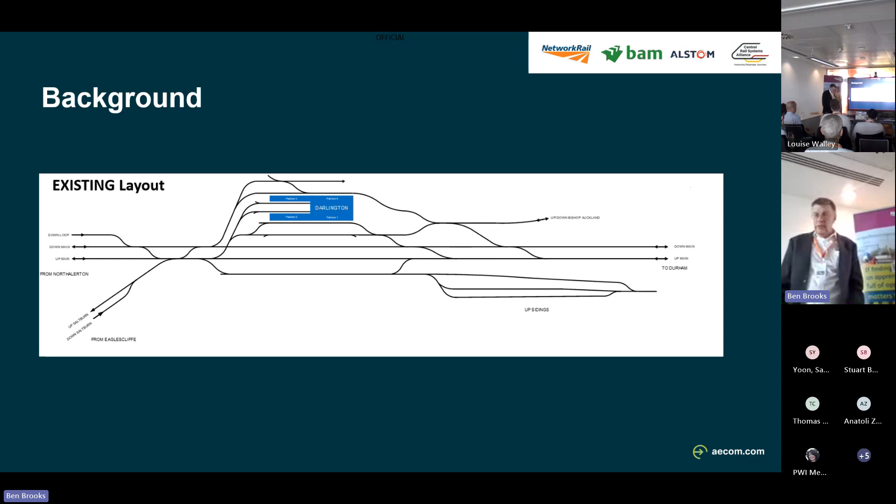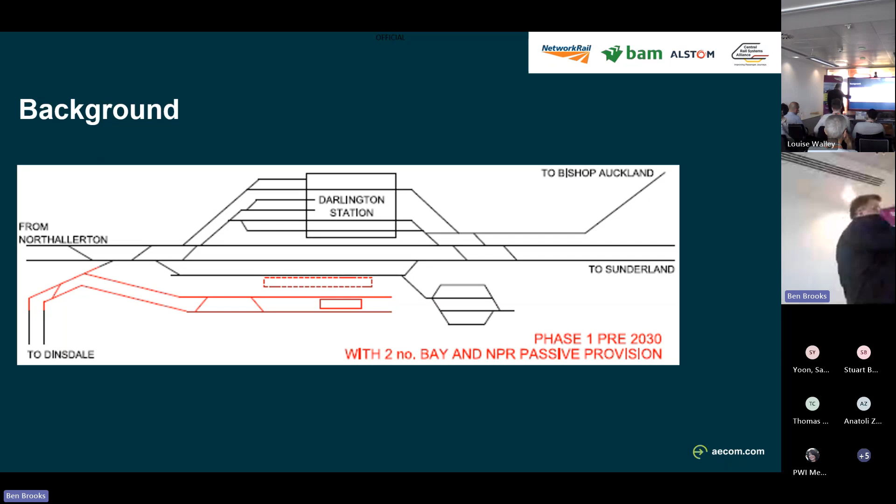So where do we go from there? After much deliberation, and apologies for the quality of this particular slide, this was we'll call it the first iteration of the revised track layout. As you can see, double tracking from Saltburn through into what was effectively 2 new bay platforms being constructed, and then an island platform, meaning that the up main could be basically diverted into the platform without having to cross the down main.

With that, obviously, there are a few issues, because you've got to then join and get people from these bay platforms and the island platform in and out of the old station. And at the same time, TVCA were looking to actually improve the whole Darlington area, develop a new multi-storey car park, enhancements to the west of the station to create, for anybody that knows Darlington, as you come up, I think it's called Victoria Road. It's not the nicest entrance way, but you've got this great grand portico that sits there, and you sort of think, oh, this could look a bit better, make something of it. So there was ideas to do that as well.

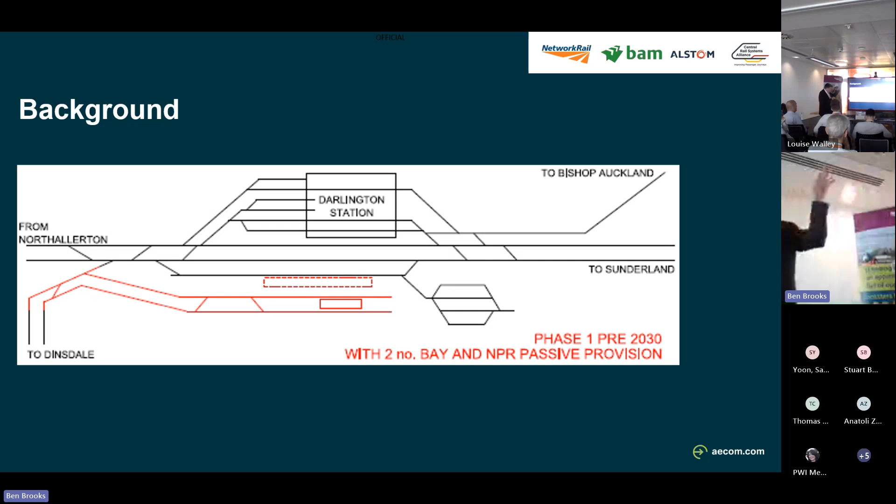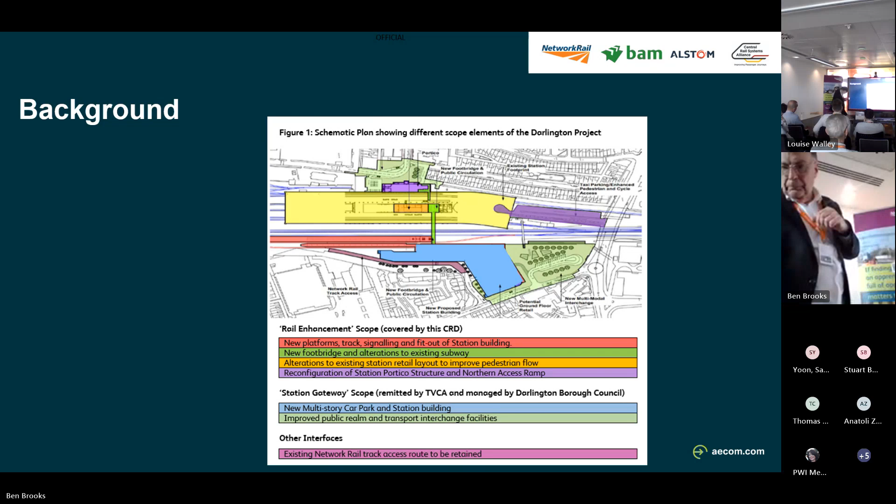How are we going to deliver this project? And this is where I come back to thinking about contractual strategies as my first point, I was saying the takeaway. What we have here is effectively the contractual arrangement. I haven't put the DFT on, but they sit obviously at the top of the screen. So Network Rail have got contracts with BAM Nuttall, with the Central Rail Systems Alliance, CRSA, and with Alstom. And BAM Nuttall have a contract with us to deliver the design for the station works. So BAM are doing the station upgrade works, CRSA are doing the track works, Alstom are doing the signalling works. So far, that seems reasonable, but a bit odd.

It gets slightly odder because we're all at different stages in our design process. We're ahead. We started ES5 back last year. Central Rail Systems Alliance started their ES5 a little behind us, but not by enough to be a major concern. Alstom are still in ES4. So they're a whole stage back, and we're trying to push detailed design out the door. And you can see straight away that's an area for potential conflict. Conflict's probably a bit stronger word. Challenge around the interface and managing the interface.

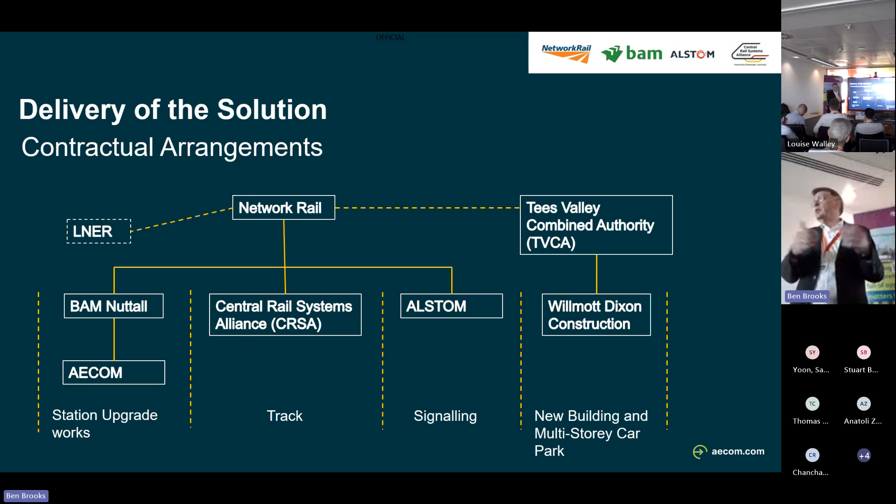And whilst, within the rail side of the team, we tend to be quite accommodating, if you're in a buildings world, there isn't that cooperation all the time. So that's quite a challenge. And that's why I think it would probably have been a lot better if Network Rail had managed everything, and brought in perhaps a different contractor to do the car park, somebody that's probably more akin to the systems and processes used within the rail environment.

Interface management challenge. BAM were appointed not only as lead design organisation, but as principal contractor and principal designer. So they have three different hats to wear. They have the CEM for the main works, but then you have CRSA and Alstom who have their own CEMs and discipline CREs, etc.

But it's quite difficult to do the LDO role if you have no contractual link to the other parties, because you need to drag them to the table, and if they don't want to come, you've got no stick to beat them with. Not that I advocate beating people with a stick, you understand, but metaphorically speaking. And then again, you've got Willmott Dixon sitting down at the bottom, almost completely different, under Darlington Borough Council TVCA.

How have BAM gone about trying to manage these interfaces? They've set up regular interface meetings, held every two weeks. We hold one with Willmott Dixon, and another with the rail team. Because we as AECOM have interfaces with both, I get to sit in on both. Everybody is meant to be using a common data environment.

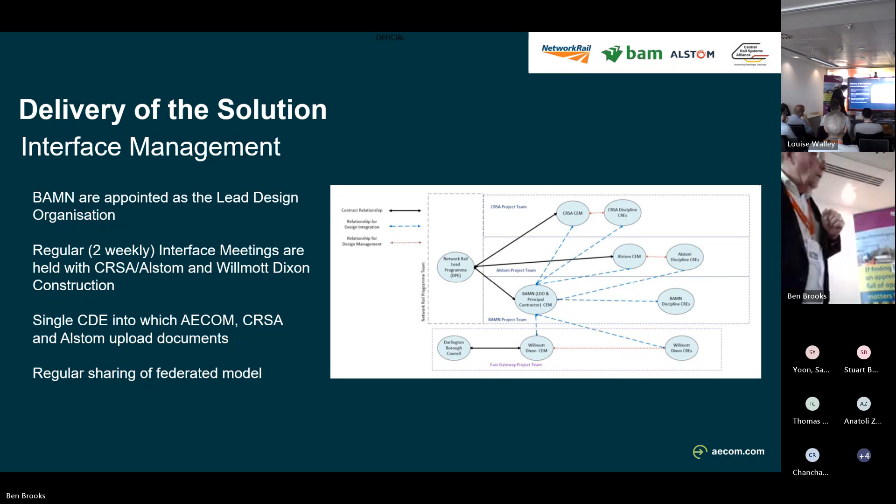Programme. Now, I could have had Gantt charts going all the way around the room, probably out down the corridor. We did a session in a hotel here in York, the integrated programme, and literally we had a big meeting room and the programmes went all the way around the wall. Bottom line, this has to be open by the time Darlington celebrates its bicentenary at the end of this year, sort of September 2025. And that's been the driver for all of this. And it's a challenge. It is a challenge.

We started our ES5 design in February '23. Site started sort of the back end of '23 working on what is known as Underbridge 98 Smithfield Road, which is just to the south of the station. Early in '24, for those of you who have been to Darlington, you'll have seen they've been putting hoardings up, and now they're starting to strip out the central area. But latest programmes show we are still hitting that date, and that is the one key.

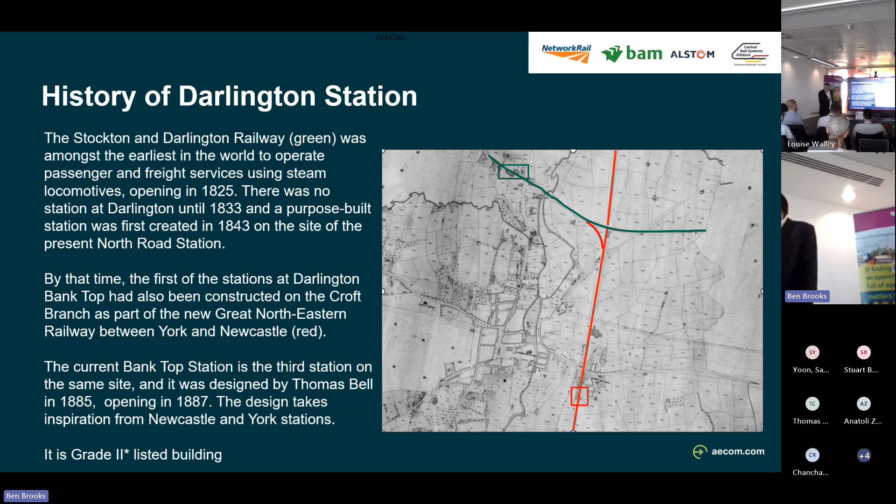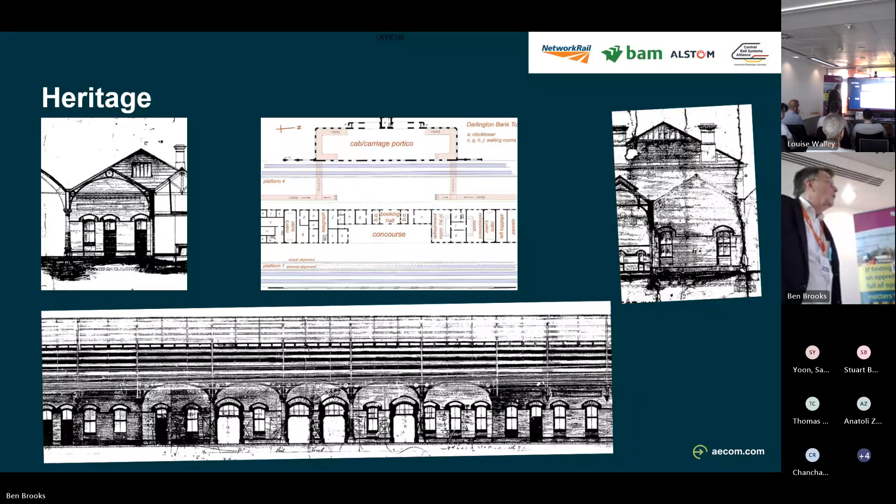This is really to chart, if you like, the interventions over the years. So top one, 1885, what you see are quite narrow passageways between the central area. There was a minor intervention in 1909 where basically they'd just enlarged the parcel office at the end of the North Range by erecting a sort of timber shed.

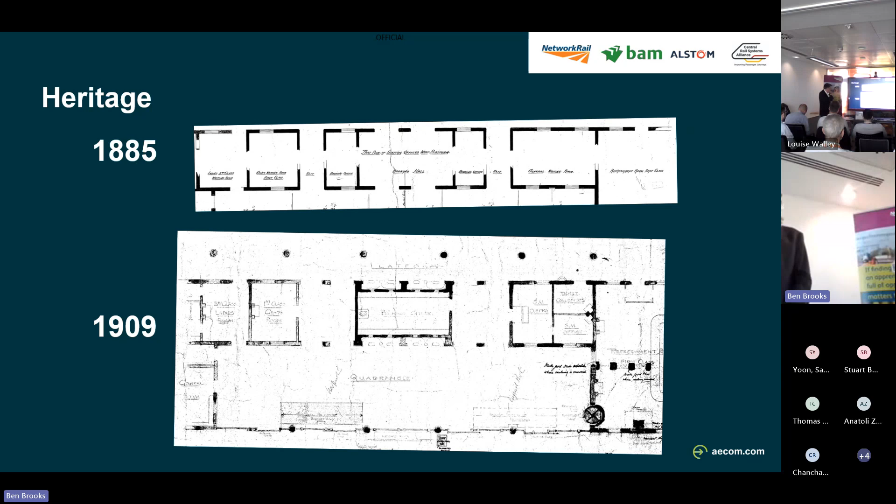The first major intervention was to widen the passageways to allow better access to and from the trains. We're not quite sure why, but obviously they must have been having issues getting people on and off, or people were feeling constrained. So they literally took out the central passages.

Nothing happened then between 1909 and 1934. In 1934, the central area was again targeted for opening up further, and for the introduction of something called a passimeter, which was a very early automatic ticket machine, which you can see down on the bottom of the top part of the slide. So that was quite innovative, and again it sort of opened up that central area even more.

And it pretty much stayed like that. There were interventions in the 50s when the South end of the South Range was redeveloped to put a telephone exchange in. In the 60s, the waiting rooms were basically refurbished. But the next major intervention was 1978, when they basically almost closed the central area back up again with the introduction of a purpose-built single-story ticket hall, some refreshments, a travel centre, various bits and pieces, and then a couple of retail areas.

And it's really interesting because these works, I believe, took place in 1978, and the station was listed in 1977. When you look at the quality of the works, you think, how did they get away with that? It's not quite in keeping with what you would expect. So I personally believe it was probably designed beforehand. It got listed, they roared ahead anyway, but who knows?

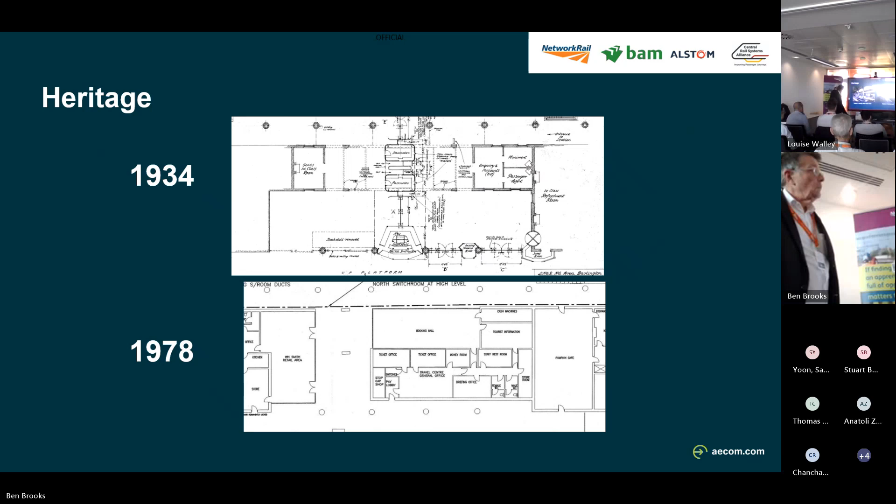There was one final intervention in 1986. So in 1909, when they put the timber shed on the end of the North Range to expand the parcel room, they actually decided to knock that down in 1986 and rebuild the gable wall of the North Range, north gable of the North Range, according to the 1885 drawings, so to restore it.

And I thought I'd just have 2 or 3 slides here showing the lovely 1970s building, dominating what was the central area. A view looking south off platform 4, and the final one from outside, showing from what was the long stay car park, looking across the East Coast Main Line at the building itself.

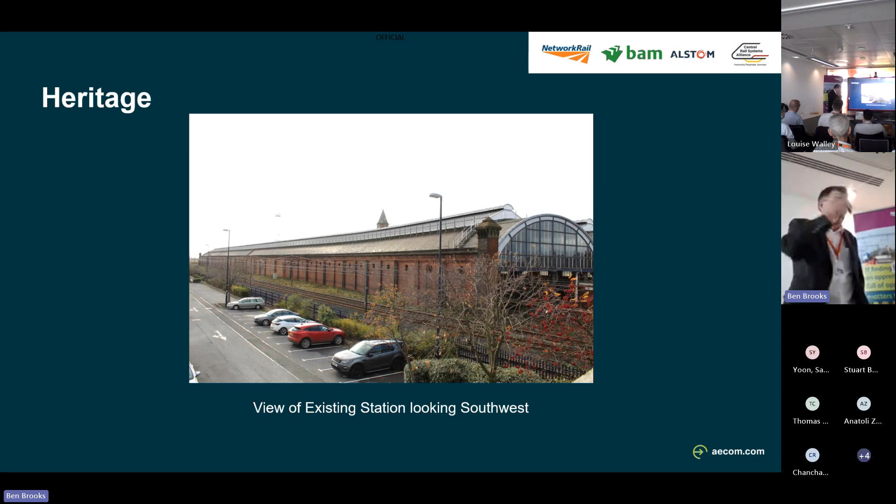When you first look at it, you think, why is that a grade 2 star listed building? It's not exactly attractive. But I think when you're inside it, you look at the steel work or the wrought iron work, the way in which the roof is, the shape, and consider its importance in the history, then that is clearly why it is a listed building.

I said earlier, we had to do a lot of negotiation, discussion, collaboration with Historic England, and we actually did a sort of a study. In our initial talks with Historic England, they were keen to see a really strong design. So this idea is, let's not try and replicate.

Let's be bold. And as part of the ES4, an optioneering study was produced for discussion. The key issues was to have an open feel on the bridge, to try and use it to give better views of the existing station building, to open up that view, and to use materials which were not mimicking but were representative or reflective of the materials within the building.

Option one was a corkscrew design.

Now, I have to say, apart from being contemporary, I'm not quite sure how this reads against the idea of the history of Darlington, the history of the station, the rail environment. You know, we tend not to do much with corkscrews, apart from on a Friday night. But, you know, that is what was option number one. And there's an example there of one in practice. Looking at the lights, it looks like it might be New York or somewhere like that.

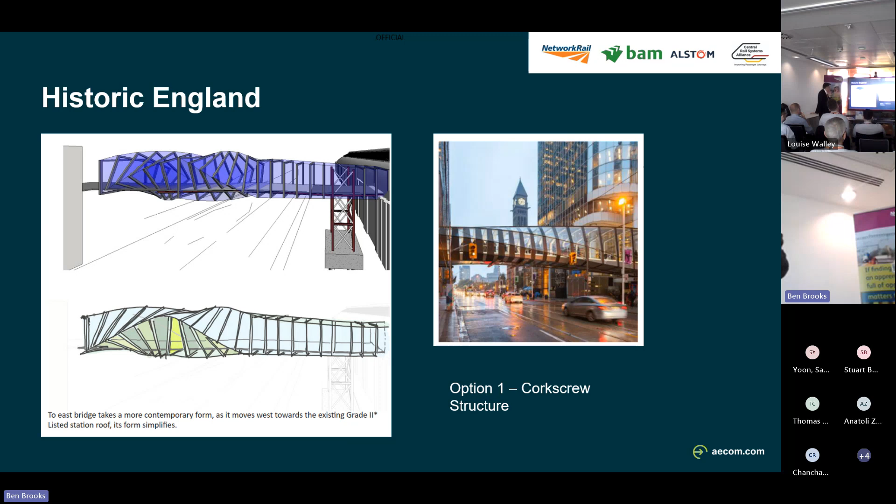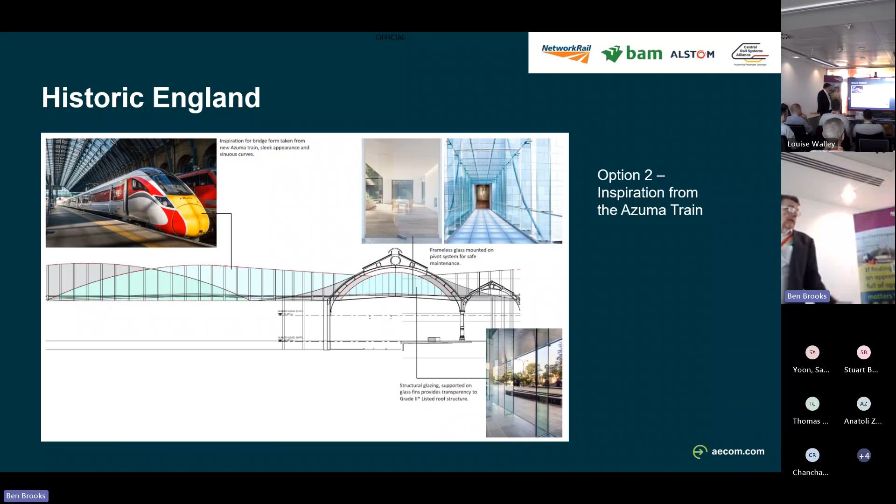Option two, now we're starting to move into the railway field, was to take inspiration from the new Azuma trains. You know, it's an LNER operated station. And so they wanted to try and reflect the sort of slight curvature and the angles from the Azuma train. You can see in the impression that they were looking at doing a massive amount of glazing and structural glazing to interface with the existing station building. Take it or leave it.

Option three was they thought, oh, we might try and reflect some track. And I'll put a picture of some track up there, because that is, to me, that's a good reflection. I then look at the sketch below and I think, yeah, I'm not quite sure how it reflects. We tend not to have track going in and out like that because trains fall off, but that's architects for you. There's none in the room, I'll take it.

But that was an idea put forward. And then, hands up in the room, which was the winner?

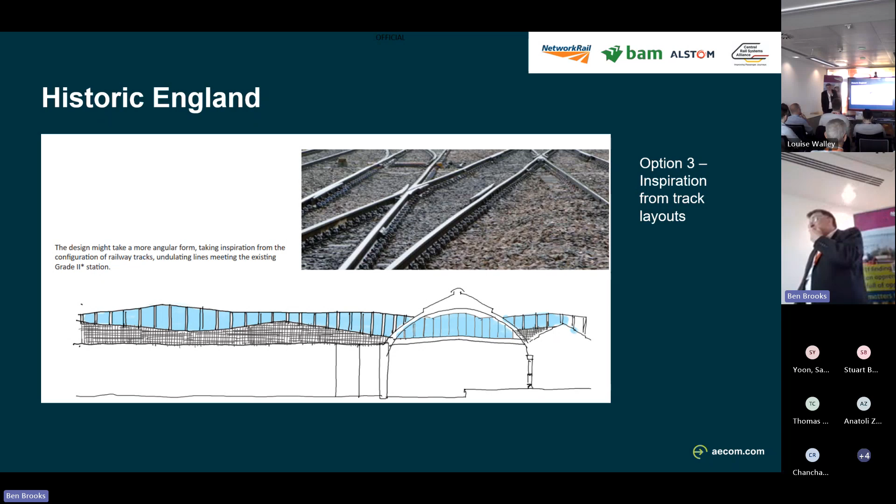The second one, yeah. And the winner was the Azuma.

You'll see in some of the pictures later on, but you can see in the middle there the angular shape, reflecting the exact angle of the front of the Azuma train. You've got the curves, top and bottom, to again reflect the sort of curvature you see. You can see on the section that it's sort of rounded, so it's narrow at the top and bulges out as it comes round, a little like the shape of the Azuma.

And actually, Historic England loved the idea. So we were on to a bit of a winner there-ish.

I'll show you some pictures later on, but every time I look at it, I think it does not look like an Azuma train to me. I've tried standing on my head, laying down. It still doesn't look like an Azuma train. For me, the Azuma train's got a curved front, but then everything else is nice and rectangular windows all the way down the side. It's sort of like, yeah, it's a bit of a mind stretch.

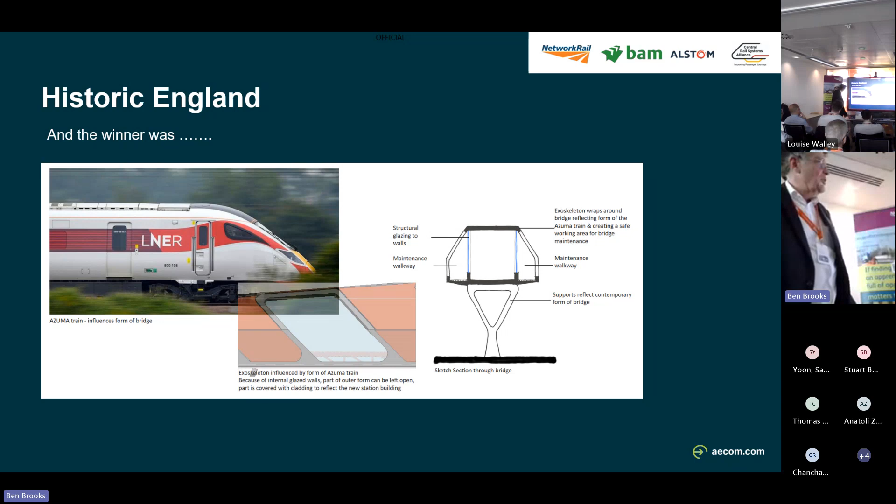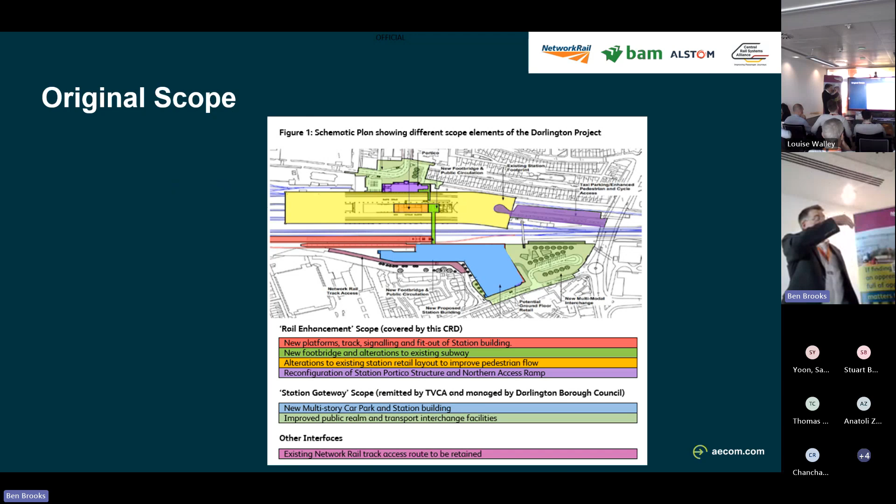Just as a memory refresher, this was the original scope, and I won't linger on it, but it's just to say, for the building, bridge, multi-storey car park, 3 platforms, portico, northern ramp.

Now, it's obviously with any project going through nowadays, we're subject to funding challenges. Not a surprise, money's tight, we all know that. Between ES4 and the start of ES5, there was an interim stage undertaken which looked at what could be done to reduce the overall costs.

So removal of platform 7, the second bay platform, was considered to be, if you like, not necessary for now. It would become more important if NPR goes on.

So that came out. All the works on the northern ramp came out. It functions now, it functions quite well, it didn't necessarily need doing.

And the works on the portico - as I said at the start, the portico is a nice piece of building. The area around it isn't so good, but the regeneration of the area around it is still within TVCA's plan. So I think we'll get that. The vision as you come up to it will still be there.

By the time we got round to signing a contract for ES5, further challenges had come in, set in the CRD from Network Rail, requiring us to reduce the overall width of the bridge. Originally it had a 4-metre wide walkway, we're down to a 3-metre wide walkway with the number of passengers expected through there. Not a major problem.

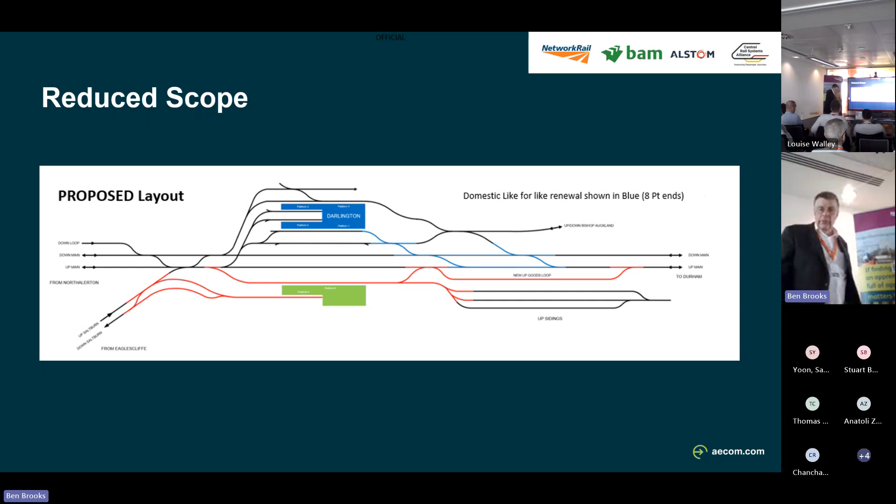Then just to take you through the different areas, this is the reduced scope. So you can see the portico's gone, the northern ramp's gone. We've got A, B, C, D. Anything in green is TVCA, anything in yellow is the BAM AECOM scope.

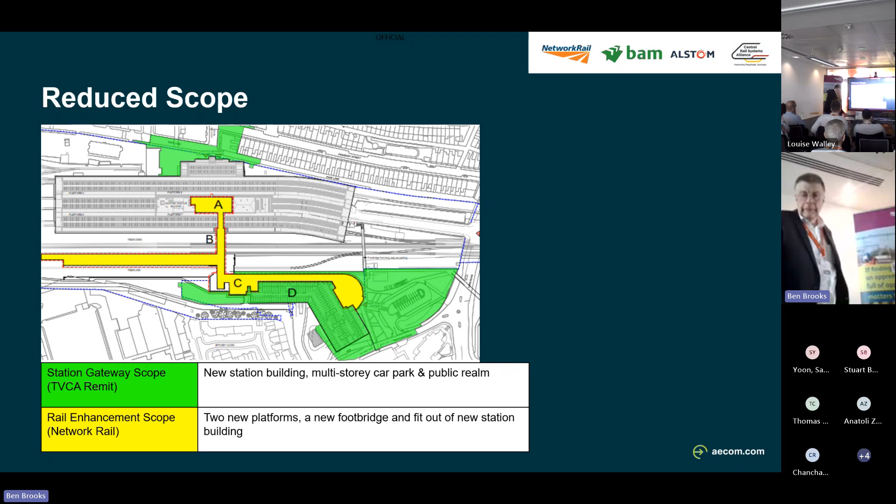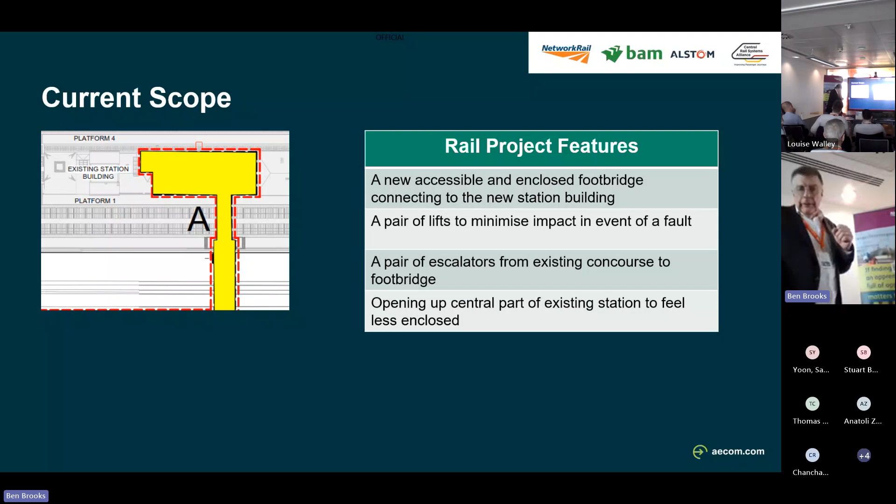In a little bit more detail, in the central area, basically we've got accessible access to the footbridge, so we've got twin lifts to give us resilience. We've got a pair of escalators, again gives you some resilience. And we've endeavoured to open up the central area again, because I think in the 1934 area it probably became as open as it was going to be, and I think the '78 additions really closed it in again. So the idea is to try and open that up a little bit and make it feel more welcoming to people.

Just slightly more detail taken off one of the architectural ES5 drawings. So you've got your escalators coming down, the footbridge comes down to a sort of split stair at the bottom, so you can hopefully go to the right part of the platform. Twin lifts. The area in the light blue is an existing ATM room, which we can't touch.

Now, interestingly enough, and I'll come on to this in a little while, it might not look like that in the final scheme of things, but just hold that thought.

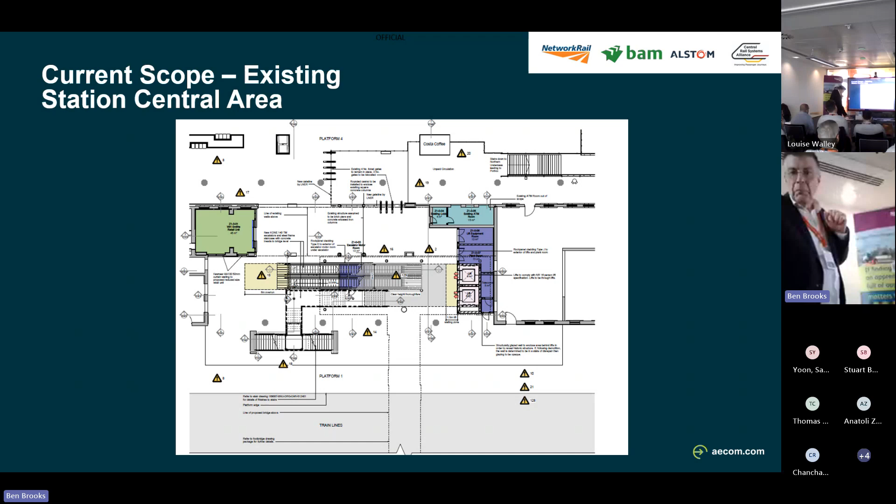The new platforms, one new bay, one new through, minimum width 3 meters to allow sufficient space for ramp and wheelchair at the bottom. A pair of lifts. Canopy coverage is not full length of the platforms, only part length. Something LNER are not overly happy with, and they tell us they've currently secured some funding to look at platforms over the full length. We'll wait and see on that one.

There is actually passive provision for an escalator. It's not actually needed at the moment, but if NPR takes place and platform 6 becomes a through platform and not a bay, they will need an escalator. There's a waiting room at the southern end where platform 5 and 6 are still concurrent, and then as you go down to the end of platform 5, there's a waiting shelter.

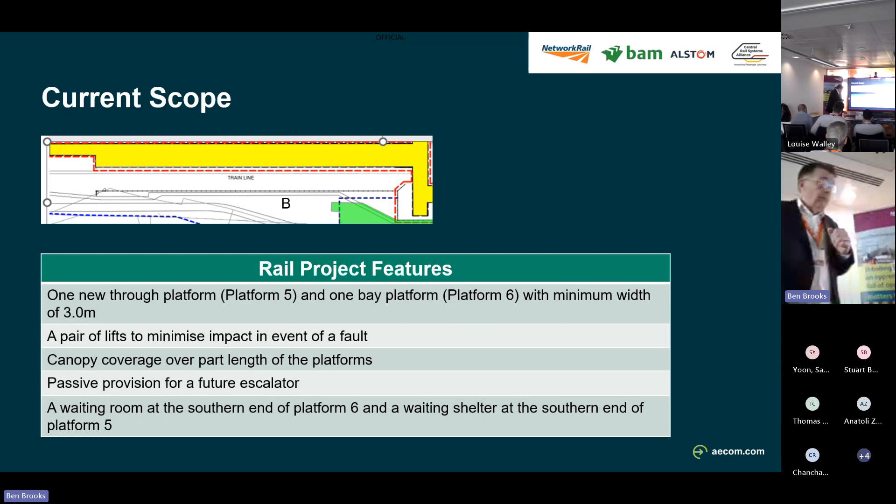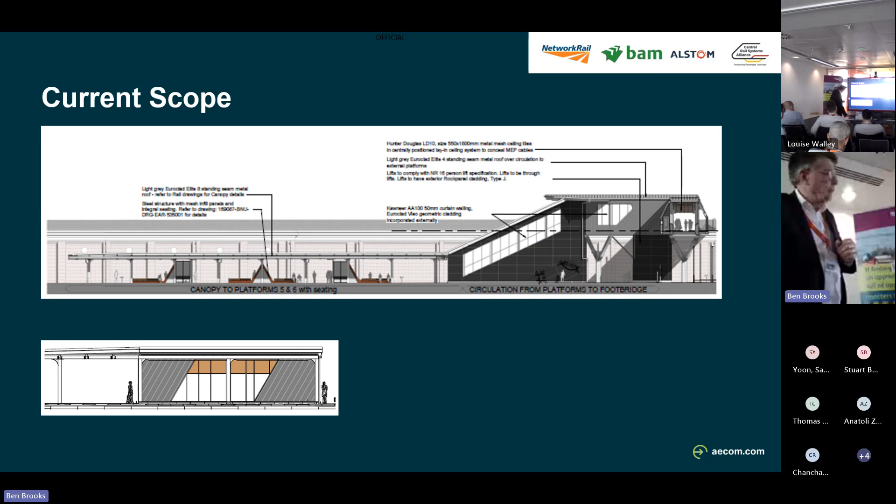Finally, we should probably look at area C, which is the fit out. So Willmott Dixon are building the building, we're fitting out the concourse, and in it there's a large waiting area in the rotunda, the curved part at the end. There's a booking hall, there's obviously a new gate line, fully accessible toilets, including changing places, gender neutral facilities, and the whole range required under the scope.

Lifts and escalators to take you up to the footbridge, again in pairs for resilience. There's a first class lounge on a sort of mezzanine level near the footbridge. There's 2 retail areas; they're not massive by retail standards, but there's 2 in there. There's fully accessible staff facilities, and there's rest points along the accessible route. So we've tried to cater wherever we can for all the requirements for the PRM NTSN.

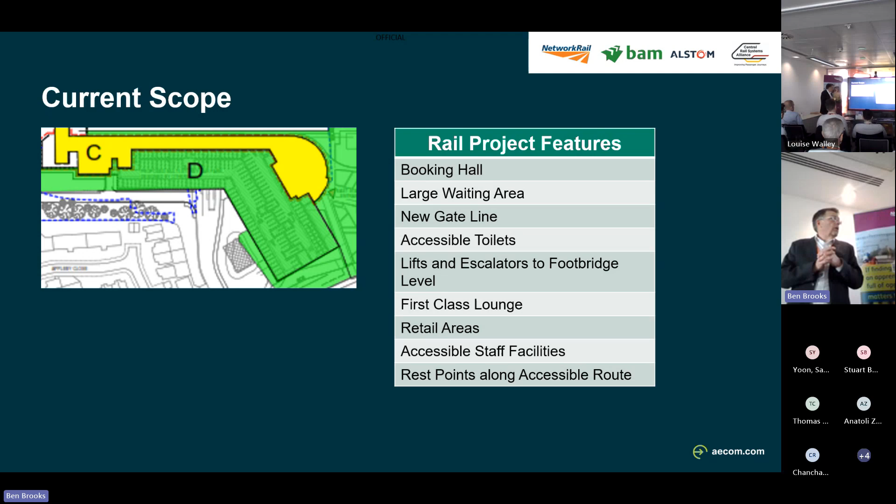There's just a slight drawing. Again, the quality of that isn't as good as what it was, so we won't linger.

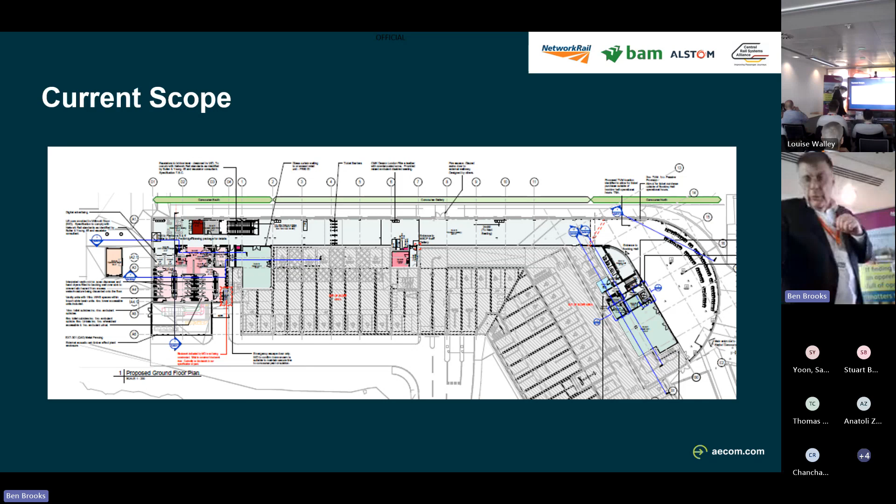Finally, the multi-storey car park. You've got 672 spaces, various electric charge points, WAV spaces. There's cycle parking, 3 new cores, each with evacuation lifts. The interesting thing was when Willmott Dixon designed the station, they didn't design the car park. They didn't think it was going to be part of the station authorisation, and so they've been caught a little on the back foot because their stairwells and everything aren't quite compliant.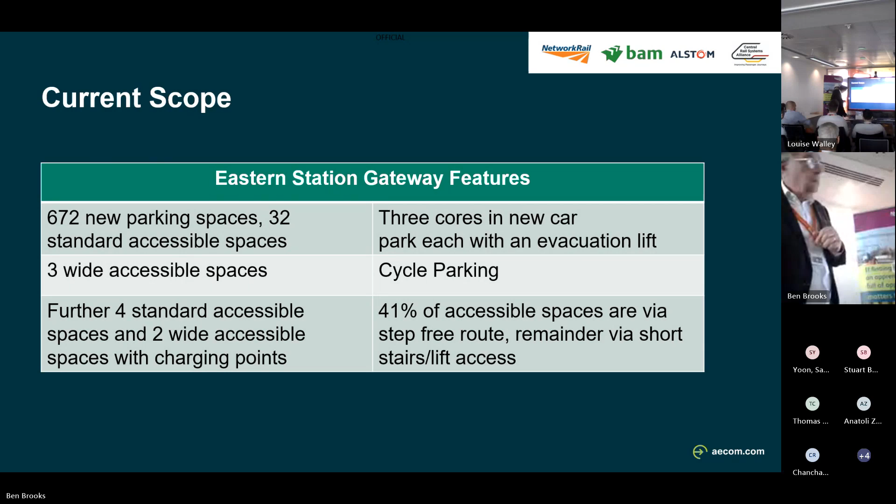And so I thought I'd finish, or almost finish, I'm sure you'll be glad to hear. We're taking a journey now - I'm actually going to do it backwards, so I'm going to start from the platform and leave the building.

So this is a view of platform 1. You can see the stairs, the split stairs, escalators behind, the lifts over in the corner, and you can see the new footbridge and how it sits into the bay within the roof. The sort of copper coloured - told it's something rust is the colour - matching the colour of the brickwork. The station clock isn't going to be there; that's its old position, it's a mistake on the render. It's actually going to be moved along one, because where it is, it would be in danger of being vandalised.

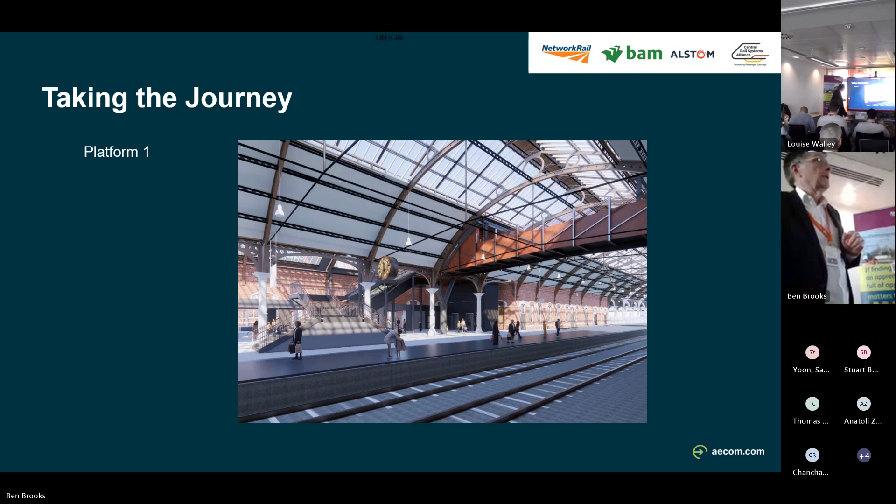I think that's clip 2. So a view up the escalators, and again you can see one of the original trusses we've kept in place. We've had to take some out to extend the roof through, but we've managed to try and retain as many features as we can.

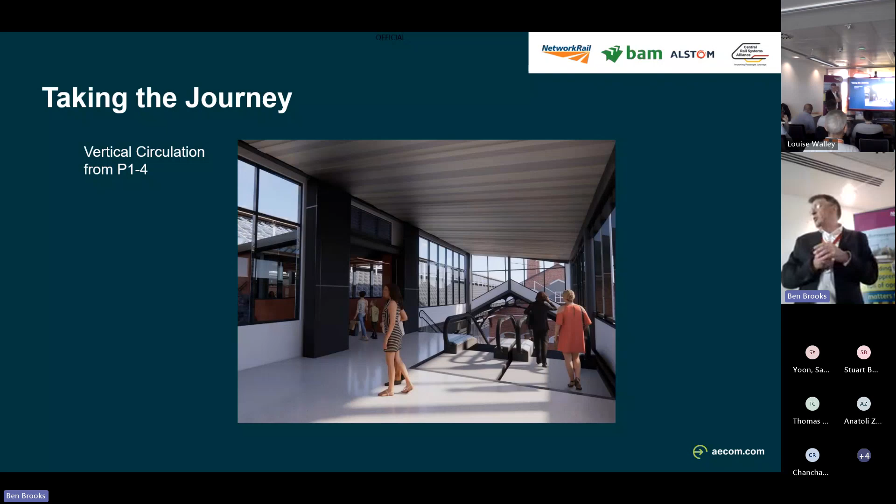From the top, with the glazing up there, this is where you probably get a view that most people will never have had of Darlington, a close-up of the roof. As you go across the footbridge, again, you're up close and personal to some of the detailing that you've only ever seen from ground level. And it's really very nice, a very nice bit of steelwork.

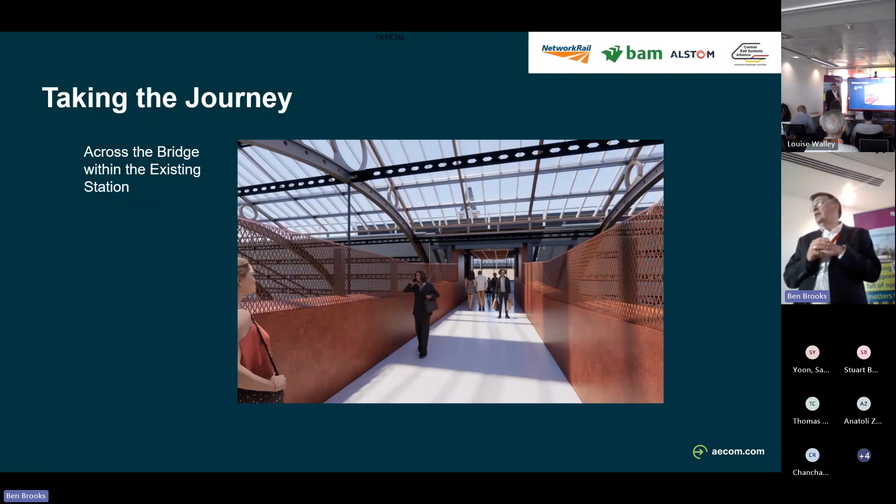As you leave the building and go across where platforms 5 and 6 are towards the gateway building, it's open. You've got glazing to keep people protected from the elements. On the external sides of the bridge, you've got two walkways to enable cleaning of the glazing and maintenance, and you've got an exoskeleton, which is being used to give the effect of the Azuma train.

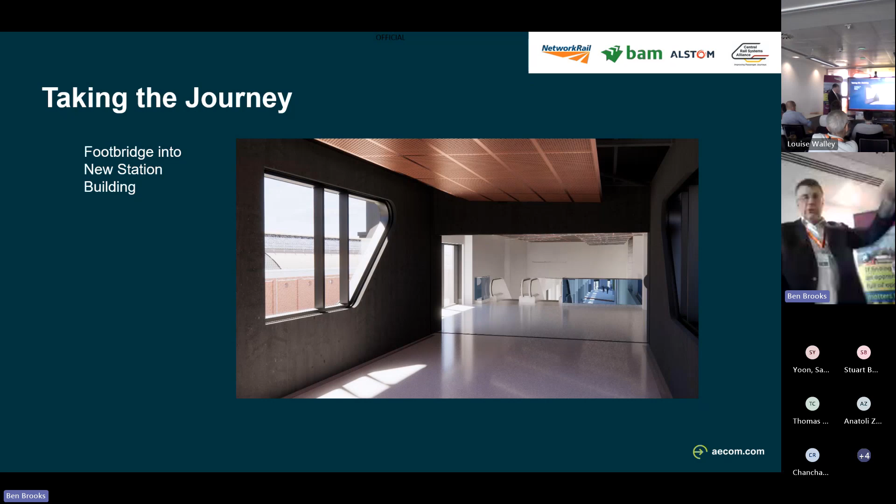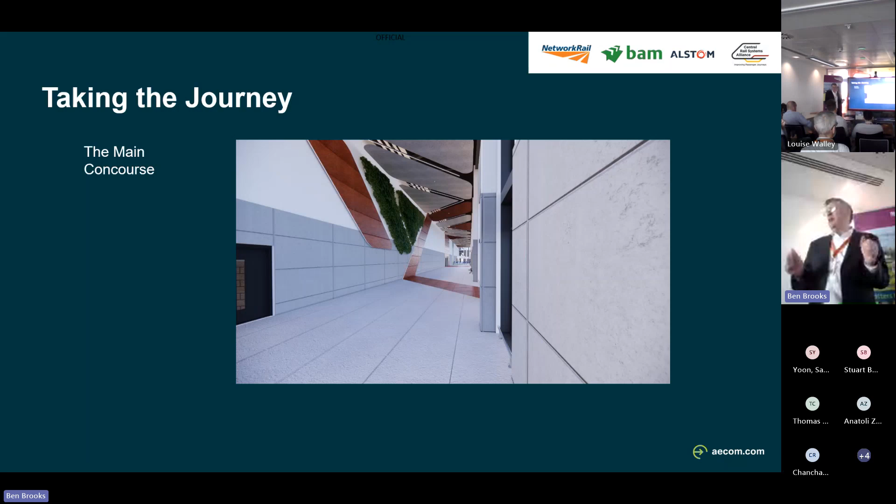So when you get to the other end, there's a little link into the new station building. You can see the escalators there, and you can see in the distance the concourse area. A little bit of colour contrast as you go along, a little bit of green wall to try and break it up. Otherwise, I think it's going to feel like a very odd, long walk concourse. You're going to think, well, where am I?

And that's the end of the slides. I probably should just briefly say something about where we are with the construction.

The demolition is well underway of the central area. The platforms are being constructed. All the precast units are going in, and they're making really good progress. The piling will be starting shortly. Underbridge 98 is ongoing. CRSA are gearing up for some of their first track moves, and Alstom are working out some of their signalling staging. And that's it, thank you very much.